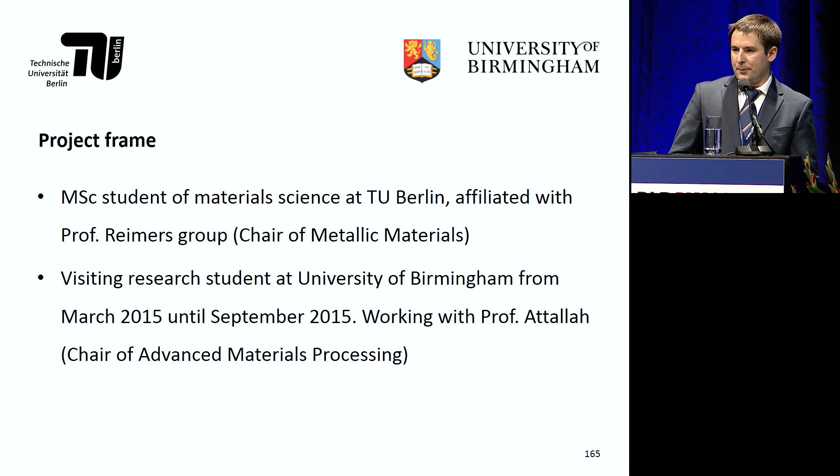Talking about the frame of my project, I was a master student of materials science at the Technical University of Berlin, where I was associated with Professor Reimers' group. Then, in 2015, I moved to Birmingham to work with Professor Attallah and his Advanced Materials Processing Lab.

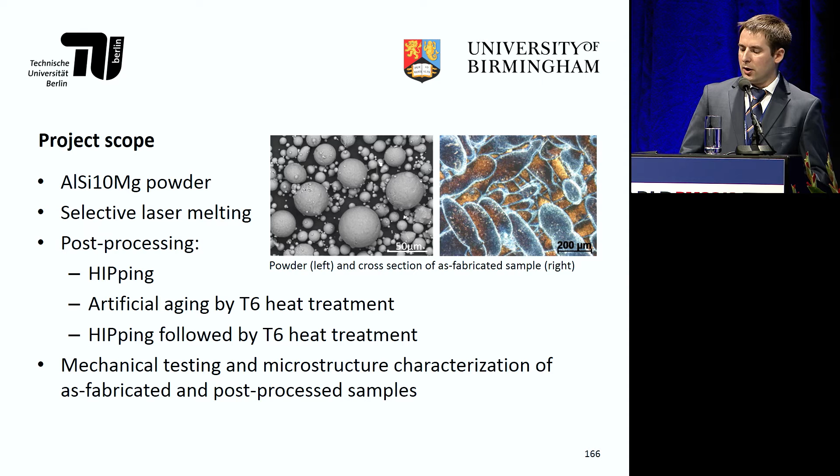My project scope. I received AlSi10Mg powder, and I performed selective laser melting to obtain samples. With these samples, I did post-processing to compare with as-fabricated selective laser melted samples. One batch of samples was hot isostatic pressed. A second one was artificially aged by a solution and aging heat treatment. And a third batch was first hot isostatic pressed and then T6 heat treated. With these 4 batches of samples, I performed tensile testing and microstructure characterization to compare the different conditions.

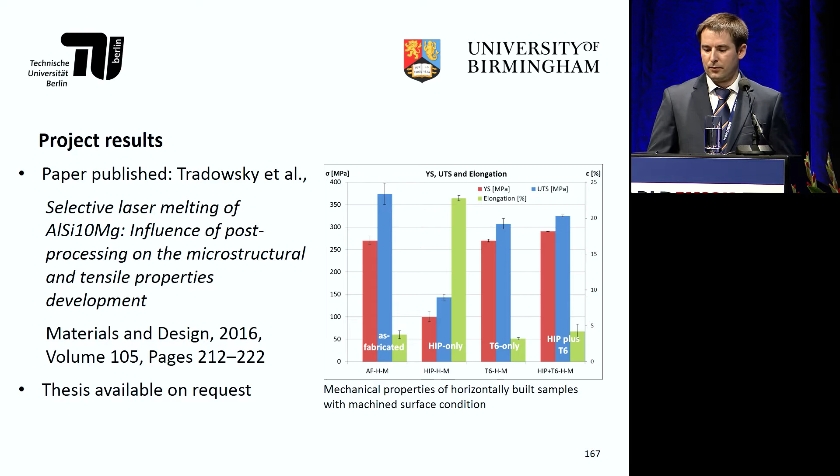After finishing my project in Birmingham, I moved back to Berlin to work for a company, Photon Laser Engineering. At this company, I am responsible for the powder-based processes, such as laser cladding, and I am involved in various manufacturing and research projects.

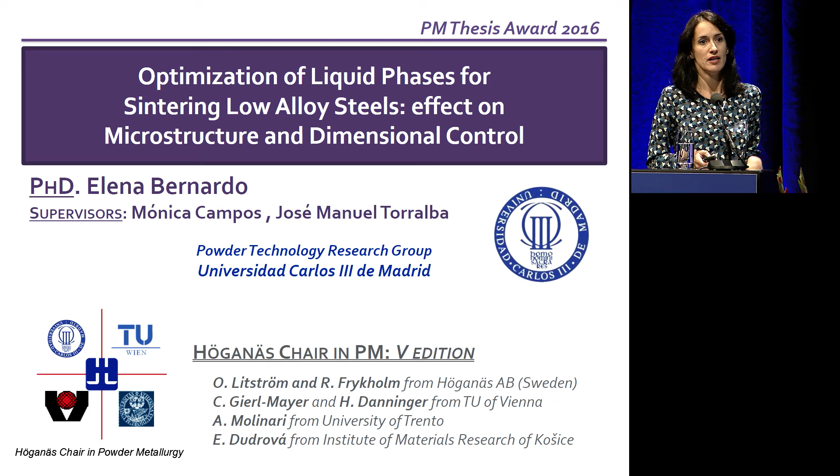So now we can move to science, and I will briefly say what we have done. We have designed new master alloy compositions with a low melting point to create a liquid phase during sintering. So we know that we have a liquid, so the question that we pose is: are we able to customize the properties of the liquid to control the dimensional performance and the microstructure of our steels?

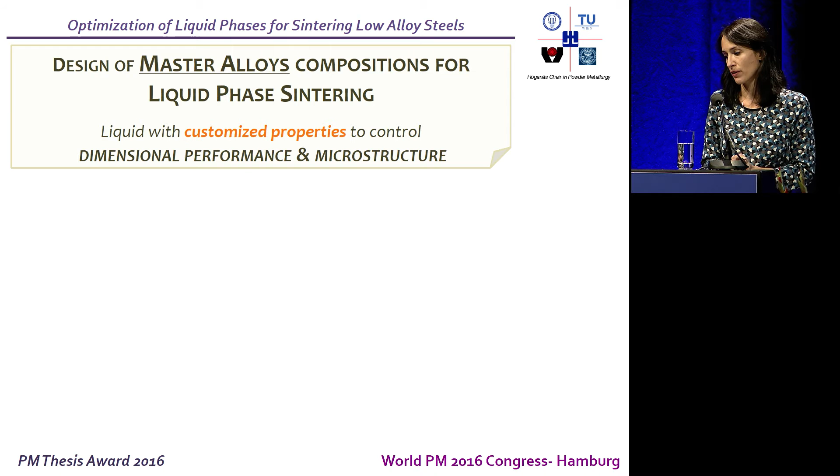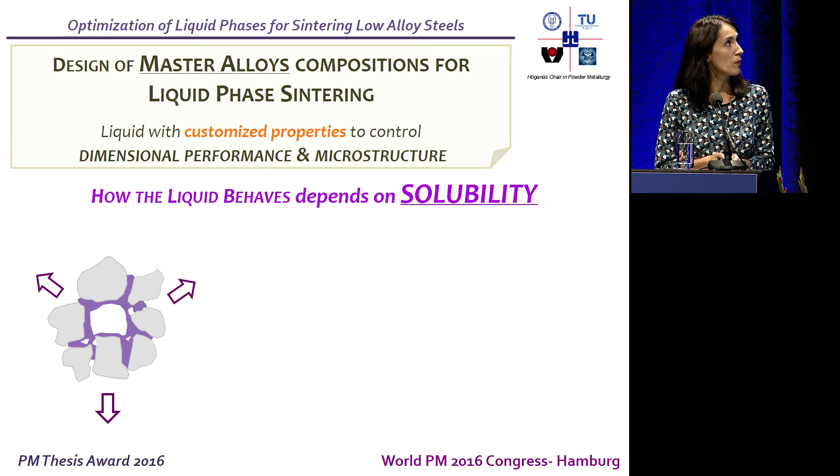And we can say that we can do it if we pay attention to the solubility relation between the liquid and the solid phase. So based on this solubility, we have two design possibilities. We can have a low dissolutive liquid, which has infiltrating properties, so the liquid creates and rapidly penetrates through the contacts. But on the other hand, we can also have high dissolutive liquids with non-infiltrating properties. This means that the liquid will be created, but will not be able to penetrate and distribute.

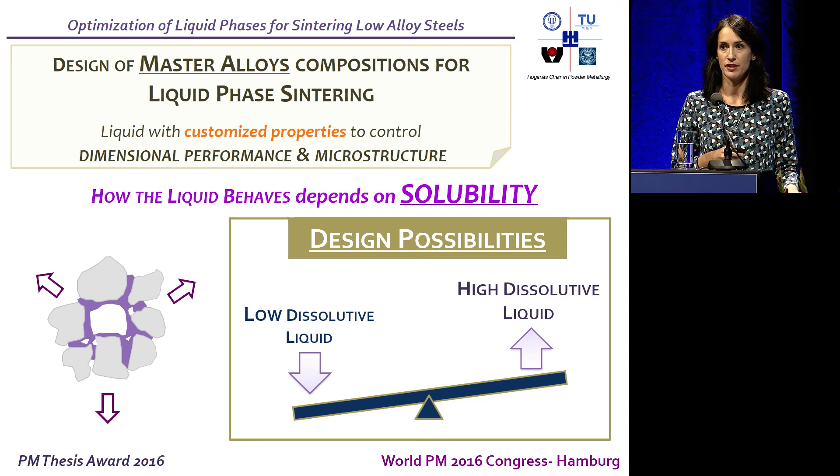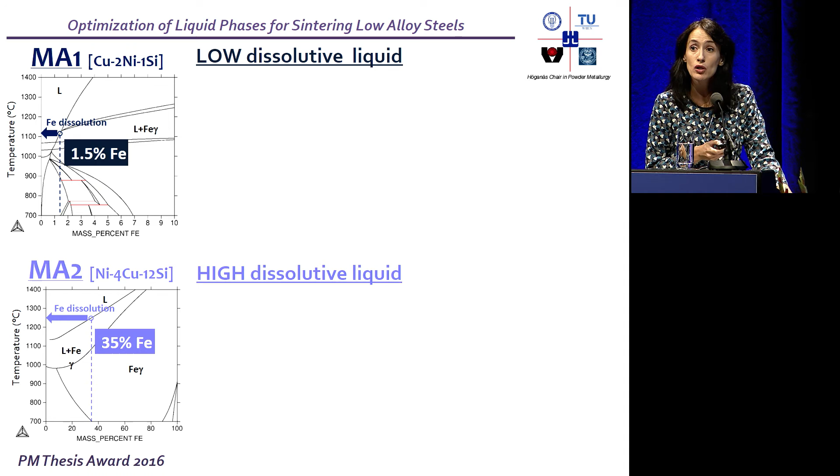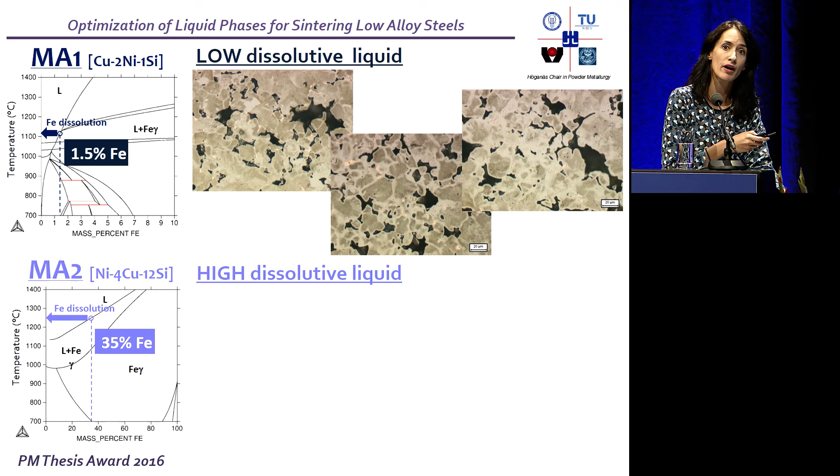Let's see which consequences this has. The first consequence we can see in the microstructure. With a low dissolutive liquid, we can create completely homogeneous microstructures, which is this case. This reminds us of what pure copper can do. But on the other hand, we can also design heterogeneous microstructures with a high dissolutive liquid, which is this case. The master alloy leads us to the liquid form, but it tends to stay where it is created because its mobility is completely reduced, and this gives us these heterogeneous microstructures.

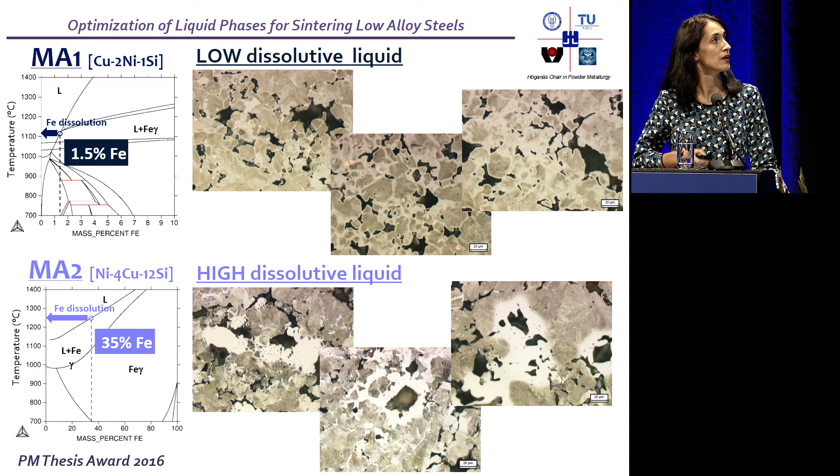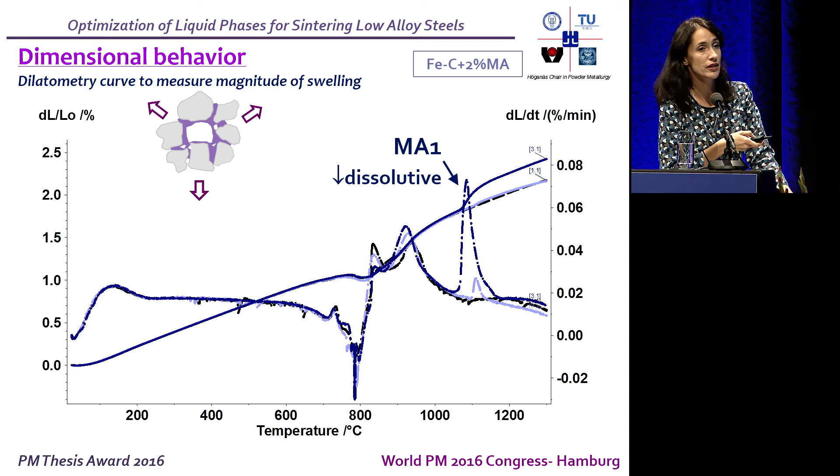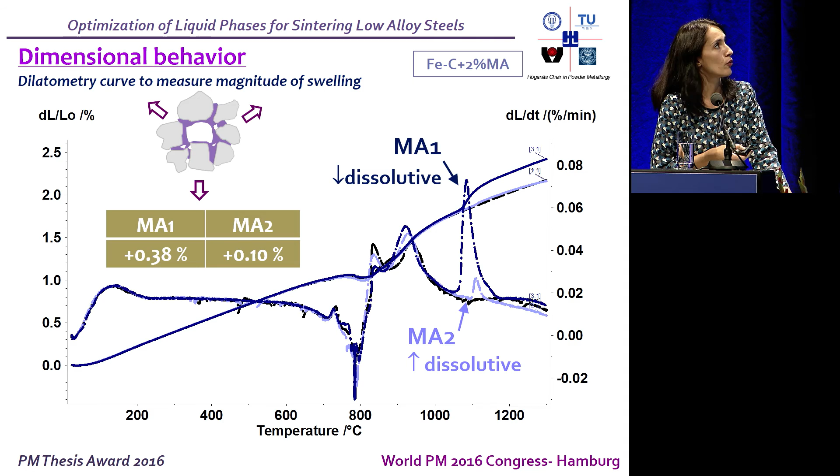The second consequence we can see in the dimensional behavior of our steel. We expect that we will have a swelling effect when the liquid forms and penetrates through these pores and channels, and we can see it here. We can quantify this swelling effect with dilatometry, but what is interesting to see is that if we have a high dissolutive liquid phase, we can reduce the amount of this swelling, almost to 1/4 of the value of what we obtain with a low dissolutive liquid phase.

More interestingly, we can design liquid phases with different sensitivity to the atmosphere, and this will, of course, directly affect the dimensional behavior of our steels. Here, what we can see is that if we have a low dissolutive liquid phase, only under reducing conditions can we decrease the amount of swelling that we have.

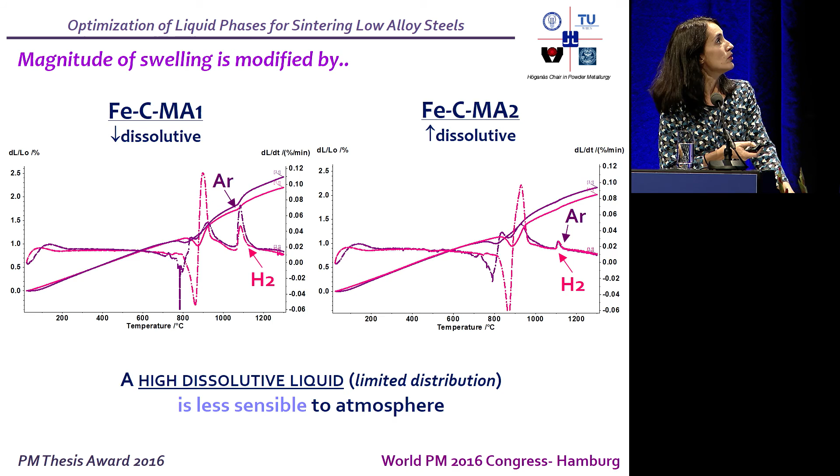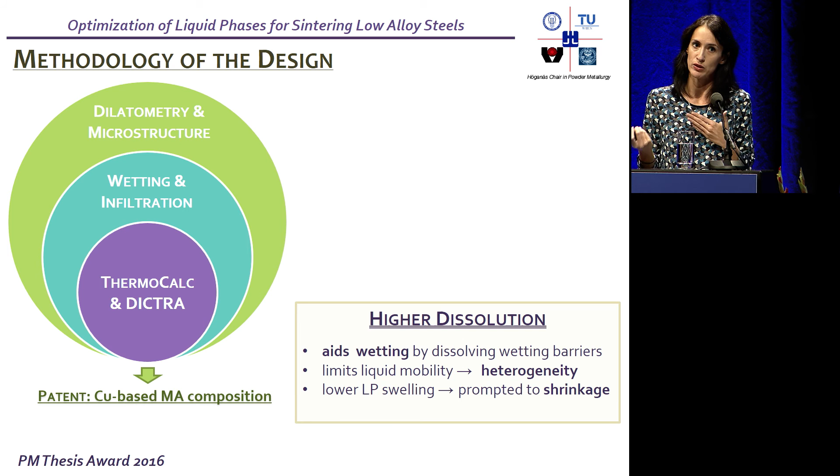So, in practice, what we have developed is a methodology of design of master alloys, taking into account this solubility from the first step of designing the composition. So when we are tailoring the composition of the liquid phase, we can also design the solubility condition between the solid and the liquid phase. We will always experimentally validate it, but what is important is that we can adapt the behavior of our liquid phase to the final requirements of our steel.

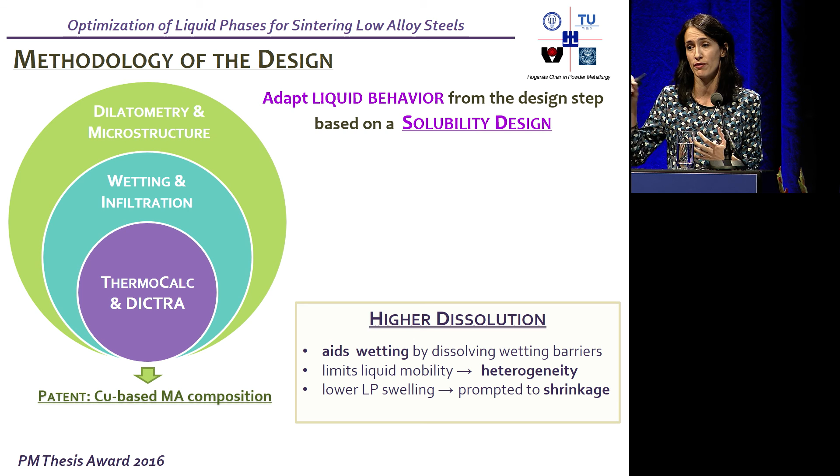So for instance, for a liquid with a high dissolutive capacity, we will aid wetting, we will always create heterogeneity in our microstructure, and we will always promote densification in our steel.